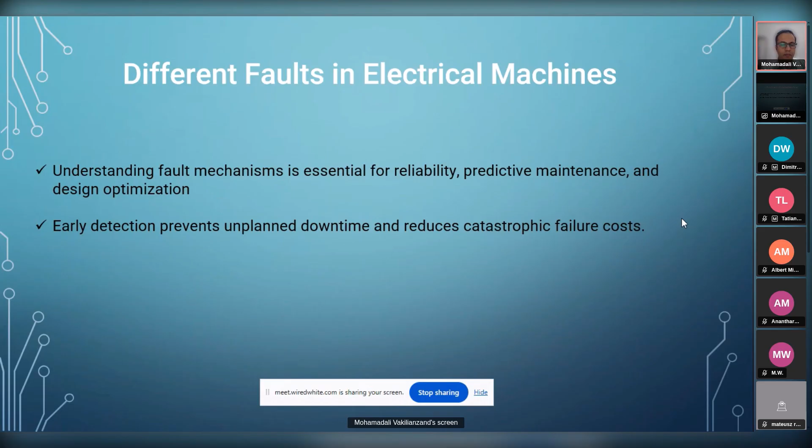Let's have a look at the classifications of different faults. Most of them overlap with each other, but in these categories we can see the electrical faults inside the stator or rotor winding, and we have supply faults like voltage source faults or inverter faults.

We have magnetic faults. Eccentricity and demagnetization are completely magnetic faults, but eccentricity has overlap between magnetic and mechanical faults. In this webinar's live demo, we will focus on the eccentricity fault: how to model it, what this fault is, and what the results of this fault are in motor operation.

We have thermal faults like overheating and insulation degradation, and mechanical faults like bearings, shaft, and misalignments like eccentricity.

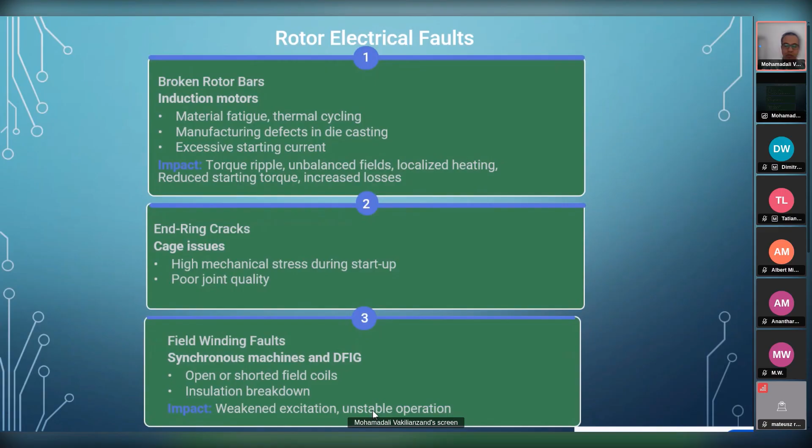About the broken bars and end ring cracks, we have almost the same effects. We will have more torque ripple, unbalanced field, localized heating on the crack or disconnected part, and the starting torque will decrease while the torque ripple increases. And we have more losses inside the machine.

But the reasons for these faults sometimes have different causes. For example, in the rotor bars we may have fatigue from heating up and cooling down - thermal cycling - that causes a broken bar. We may have manufacturing defects in die casting: if we have very small slots inside the rotor, the possibility of the aluminum inside the bars not connecting properly is high. And when we have line start induction motors, high starting torque or high starting current will both cause shock inside the bars and make them broken.

About the end rings, because usually in motors we have copper instead of aluminum, we have to connect the rotor bars together and weld them, and this may cause problems in the joint quality. We also have stress and fatigue affecting the end ring.

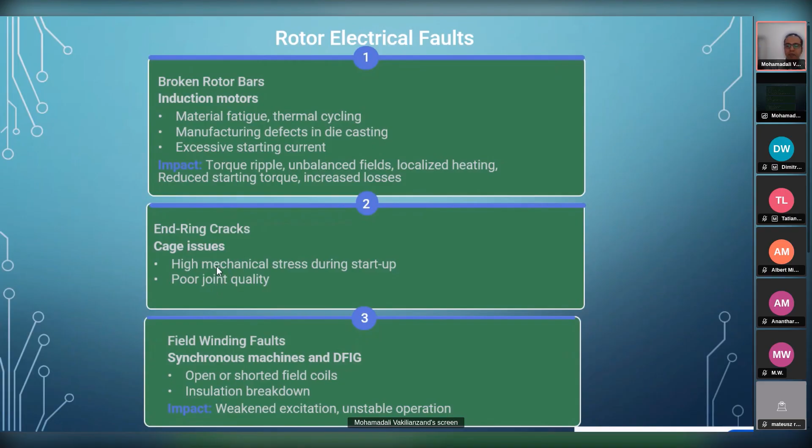About permanent magnet demagnetization - that is a very common fault inside motors with permanent magnets like BLDC or PMSMs. It means we have partial or complete loss of magnetic remanence, the strength of the magnet inside the motor.

Some causes we can count: high operating temperature near the Curie point, or even when temperature is high but still below the Curie point, the demagnetization curve will be lower, and with a lower negative magnetic field, the magnet can be demagnetized completely. We have a high temperature problem here.

If we have high temperature, the risk of demagnetization will be higher, along with excessive armature reaction in fault or overload conditions. When we have negative flux density in comparison with the magnet's flux density, we have the risk of demagnetization. And of course, mechanical shock and impact will damage the magnets too.

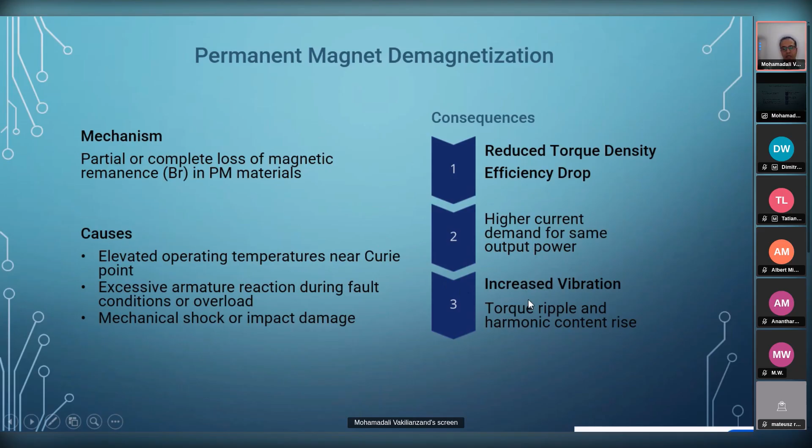It will reduce the torque density, it will reduce the efficiency, we will have higher current for creating the same torque, and we will have higher torque ripple and vibration inside the motor.

The fault we will talk more about in this webinar is eccentricity. Eccentricity means unequal air gap between the stator and rotor. With this definition, we have different eccentricity types: static, dynamic, and mixed eccentricity.

Static eccentricity happens when the rotor center and the stator center are both fixed, but they are not aligned, not at the same point. We have a smaller air gap in some part and a bigger air gap in other part, but everything is fixed. The air gap is fixed in this position.

We have dynamic eccentricity when the rotor center rotates around the stator center. In this way, the air gap is not uniform, and the smallest part and biggest part will change in each cycle. And of course, we have mixed eccentricity, which is the combination of both of these faults.

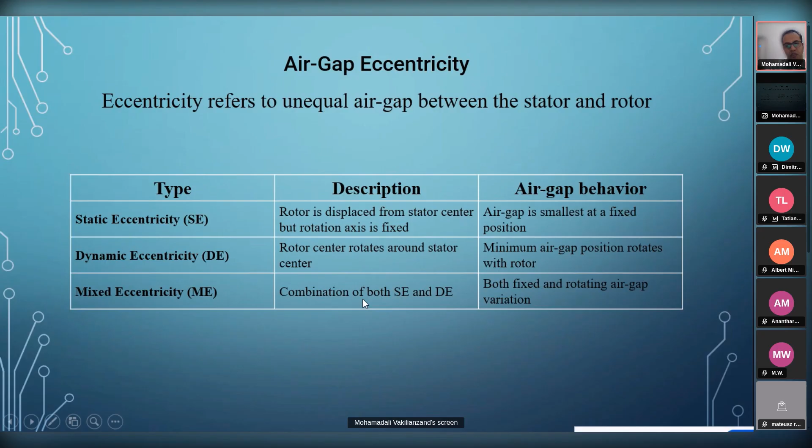To have a better view, I created an exaggerated video about each of these eccentricities. As you can see, in static eccentricity, the rotor center is fixed, the stator center is fixed. They are not coincide, they are not at the same point.

In dynamic eccentricity, the rotor center will rotate, and in this way we have a non-uniform air gap that changes at all time steps. With mixed eccentricity, both of these faults exist together.

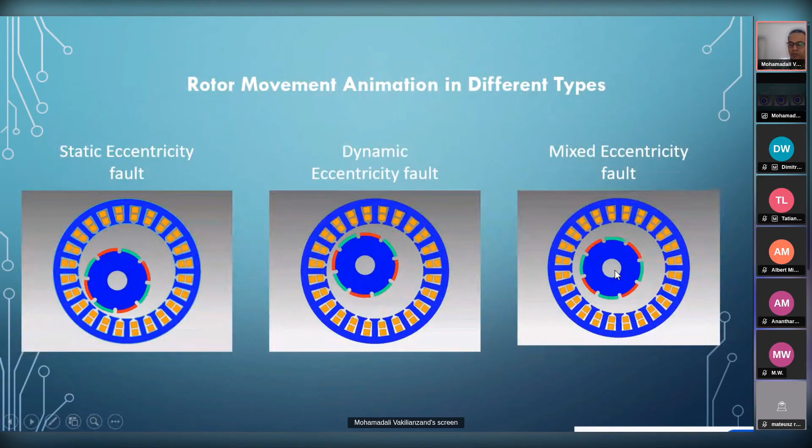To review some causes of these faults, I gathered some of them, but you will see the recorded video of this. You will have access to the recorded video and this PowerPoint if you fill the chat box and the poll that my colleague shared. The cause of static eccentricity usually refers to manufacturing tolerances and bearing misalignment.

Usually static eccentricity happens during the manufacturing process and it will be fixed. Stator core deformation will cause static eccentricity too, or rotor positioning during assembly. And sometimes we have faults in the frame, and the frame is distorted.

Dynamic eccentricity usually happens at the operation point, due to bearing wear or looseness, rotor shaft bending or deformation. It can be due to magnetic forces or thermal problems.

Unbalanced rotor happens when we have uneven mass distribution on the rotor, and thermal expansion occurs if we fix both sides of the bearing and have a hot shaft; the thermal expansion will cause some deformation in the shaft.

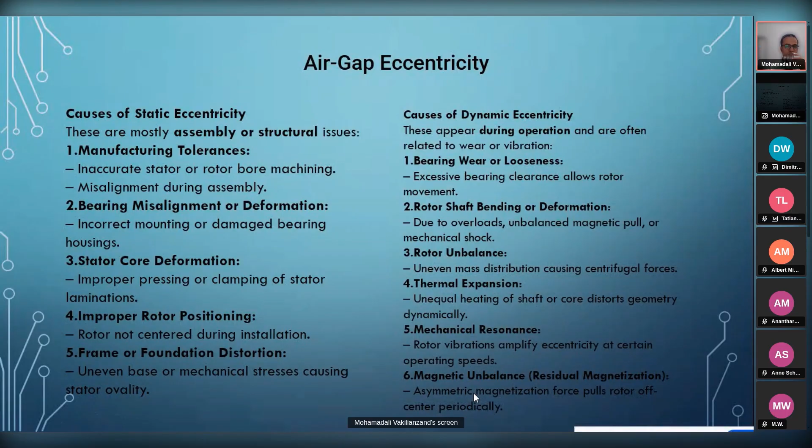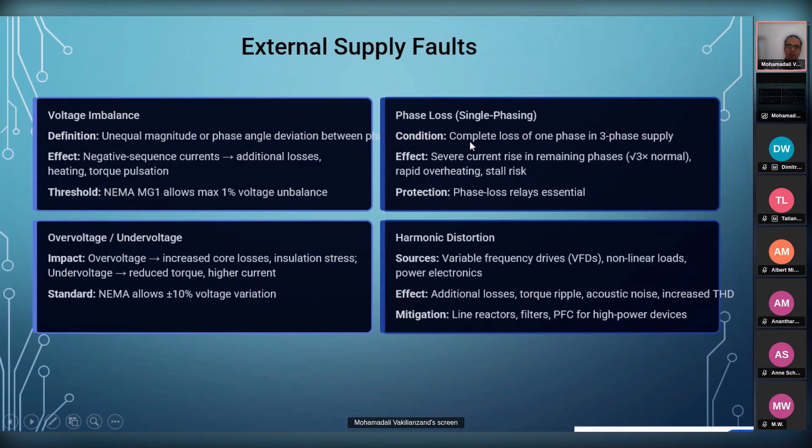Now we will go to have a live demo in the software to model the eccentricity fault. After that, if you have any questions, you can write them during the webinar, or afterward inside the chat box, and I will be glad to answer them all.

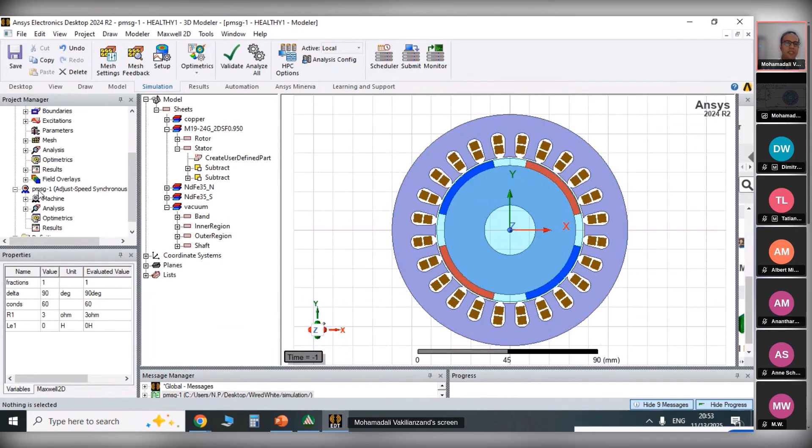For simulating the project with static and dynamic eccentricity, I choose a surface-mounted permanent magnet synchronous machine, a surface-mounted PMSM. You can draw the whole geometry by yourself manually, or you can use RMxprt models, the predefined parametric simulation, a template-based model of the motor.

Just remember, to model the eccentricity, you need to have the whole complete model of the motor. Because if you use symmetrical or periodic boundaries, it will model the eccentricity or any other faults like demagnetization, coils, and other faults uniformly and periodic on different segments too. So you will not see any effect, or you will extract wrong results. So to model any faults, try to have the complete model of the geometry.

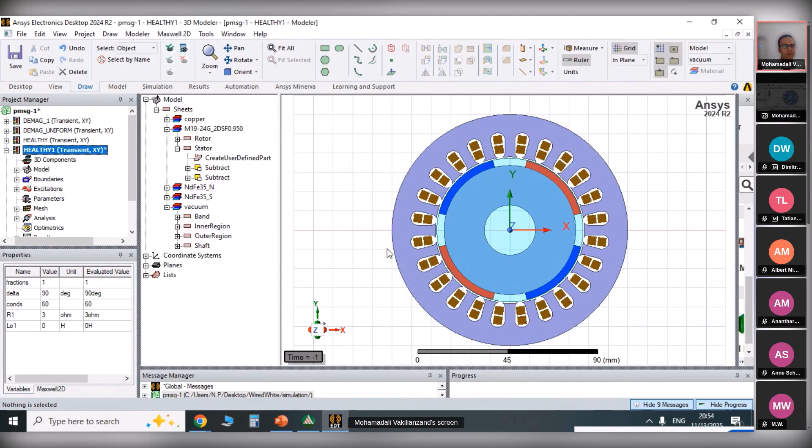I created this model with RMxprt. It's one of the default examples of RMxprt. But to have a better view and easier simulation, I made the air gap a little bigger. Now we have 1 millimeter air gap between the rotor and the stator.

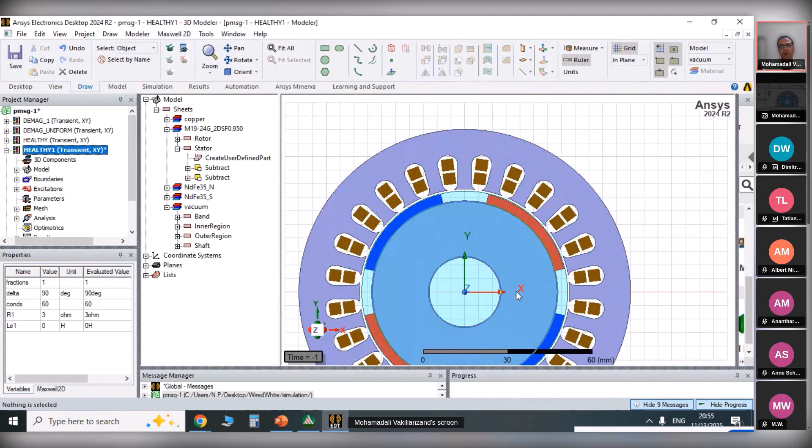Now let's start. This is the healthy machine. Everything is at the center. The rotor is at the center of the stator, and the center of rotation coincides with the stator. This is the healthy machine, and for getting the results, first model the healthy machine and extract all the results. We will see differences in the torque, in the back EMF, and in the current harmonics.

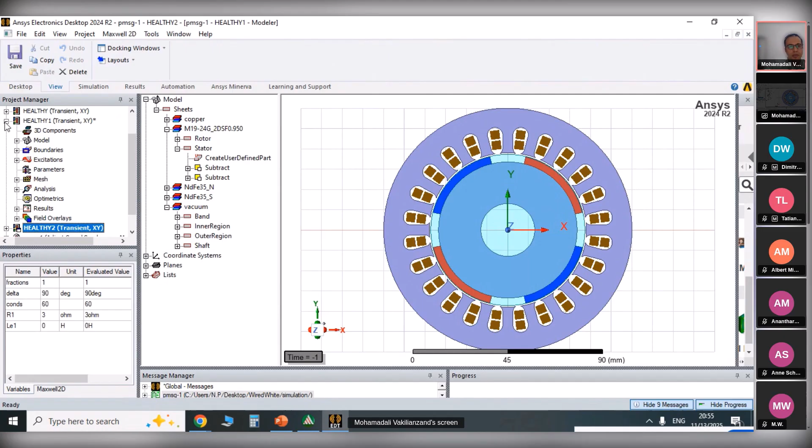I model this simulation as a healthy one. I will make a copy to be able to model a static eccentricity. Just copy the healthy machine to have exactly the same geometry and setting to be able to compare the results. I create another model and rename it as static eccentricity.

We talked about static eccentricity. It will change the center of rotation in comparison with the center of the stator. So now how can we model that problem?

Remember, when we assign a band for the rotation, of course we don't have enough time to review the modeling of the machines step by step from the beginning. But if you create your model from RMxprt, it will assign most of the parameters automatically.

When we have a band of rotation and we assign it, we choose the moving vector around the global Z. We can define different coordinate systems, but for easier simulation, I choose this way. Don't change the rotor center. Always the rotor will rotate around the center of the global coordinate system, around the Z axis.

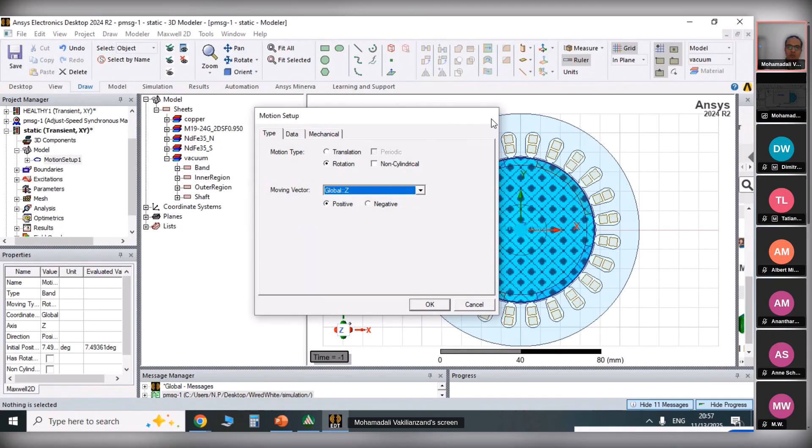So we don't change the rotor setting. Instead, we have to select all the other parts than the rotor, like all the coppers and the stator, and remember not to forget about the outer region or any other parts that are related to the stator. Because if you move some of the parts and not the others, we will have contacts and overlaps, and you will have errors.

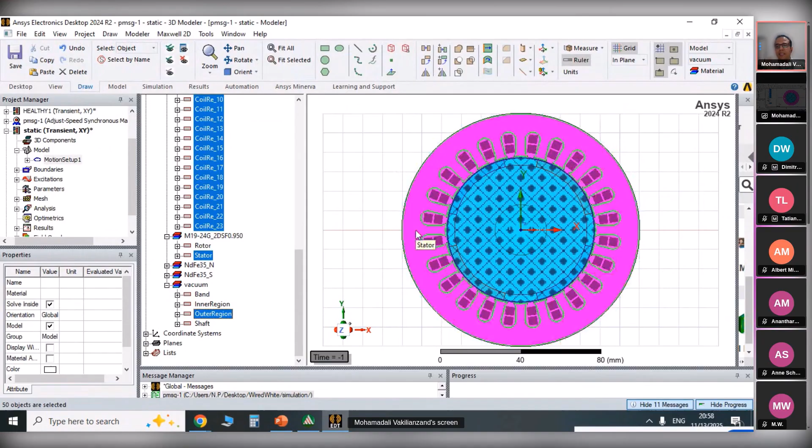So the center of rotation of the rotor is the global center. I want to change the center of the stator instead. It doesn't matter if we change the rotor or the stator. For a static eccentricity, the easiest way is to select all the parameters of the stator and move them.

For example, we have 1 millimeter air gap. I want to model 30% eccentricity, so I will shift the whole geometry from 0, 0, 0 to 0.3 millimeter in the X direction. You can choose any other vector to model the eccentricity, but it doesn't actually matter because the motor is rotating and the results will be the same.

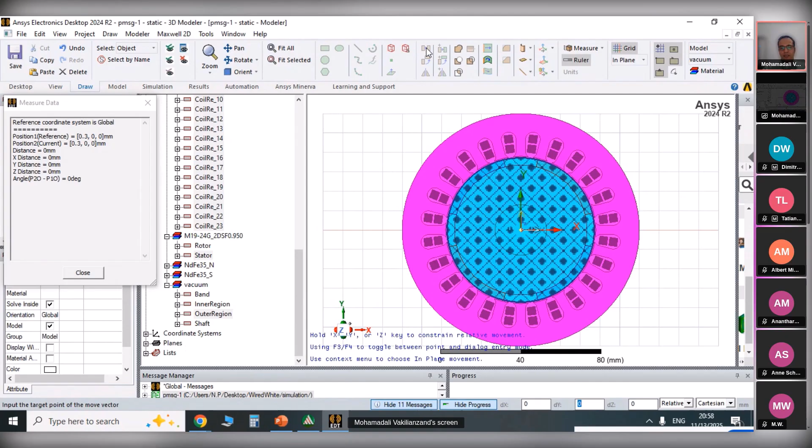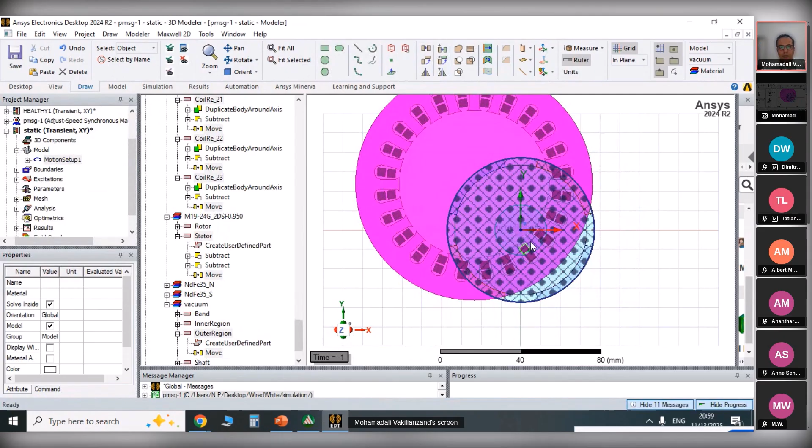I made a mistake here. I have to retype the 0, 0 and enter. I think I again made big values. If you want to type exact values, use the keyboard to change the numbers. I used the mouse button and it made a problem here.

I have to do it again, select all the values, move it from 0, 0, 0 to 0.3 millimeter. It's a very small change, but that's the way it happens in real life too.

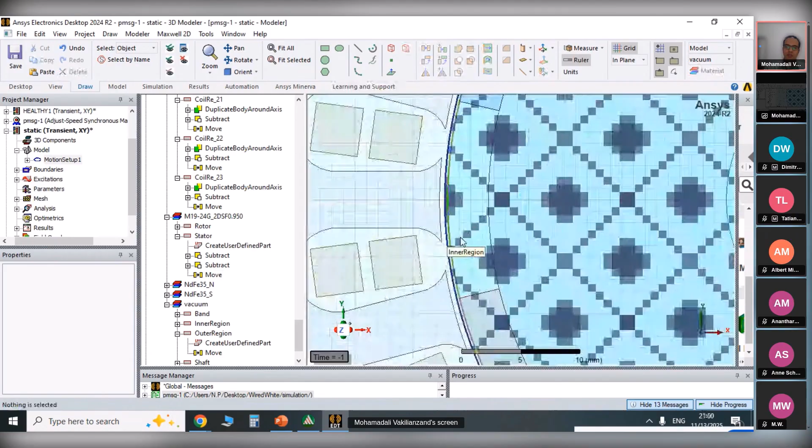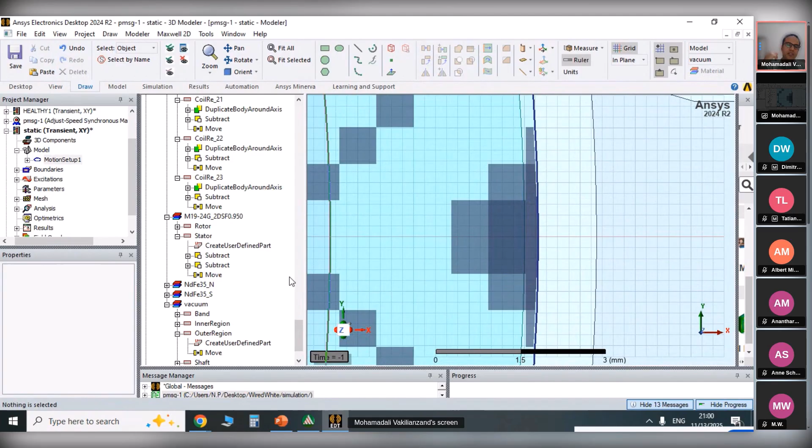Before moving on to the dynamic eccentricity, I want to let you know a trick to create a parametric simulation. Actually, ANSYS Maxwell will not let you use a parameter in the moving part. When you are moving objects, you cannot put a parameter inside the values of movement.

But after you moved everything, you can right click on the name of the simulation, go to design properties. When we add the parameters, add a parameter like static ECC, a static eccentricity.

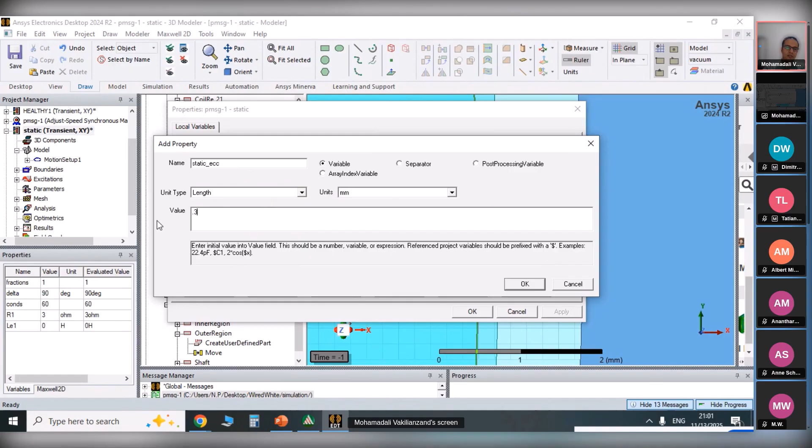Choose the value as length in millimeters, and make the initial value 0.3 millimeter as I designed. Now you have a parameter named static eccentricity.

You cannot move everything when you're clicking on the move object, but in the design tree you will see all the parts that are moved. You can select all the movements one by one, holding the control button. After you selected all of them, come here in the properties and you will see all of them moved by 0.3 millimeter.

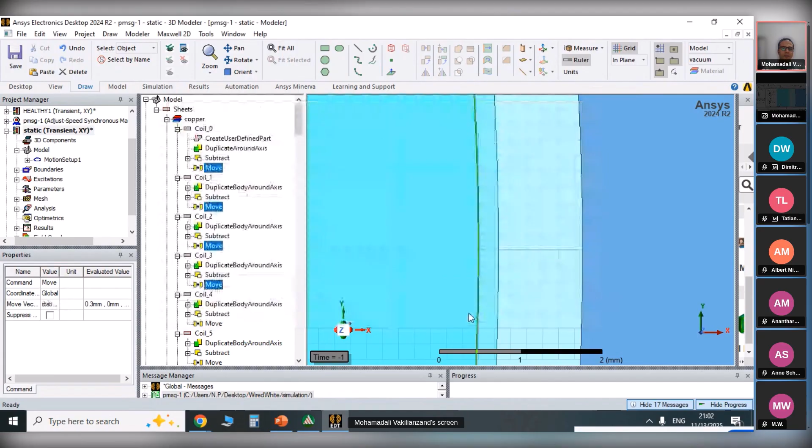Instead, you can write your own parameters that you created. This way I don't want to spend time selecting all of them. I selected some of them, but I want to show you the effect. If I select some of the coils, and let's do the same for the stator core too, the static eccentricity.

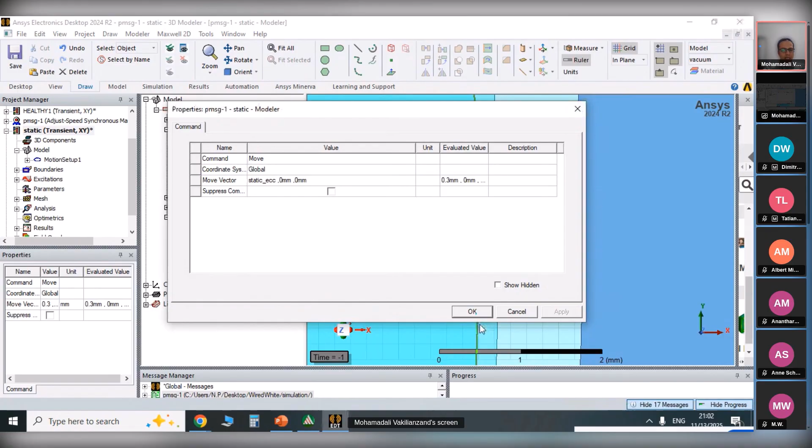Click on apply. This way, without doing the same process again from the beginning, you can simulate different scenarios with different eccentricity sizes.

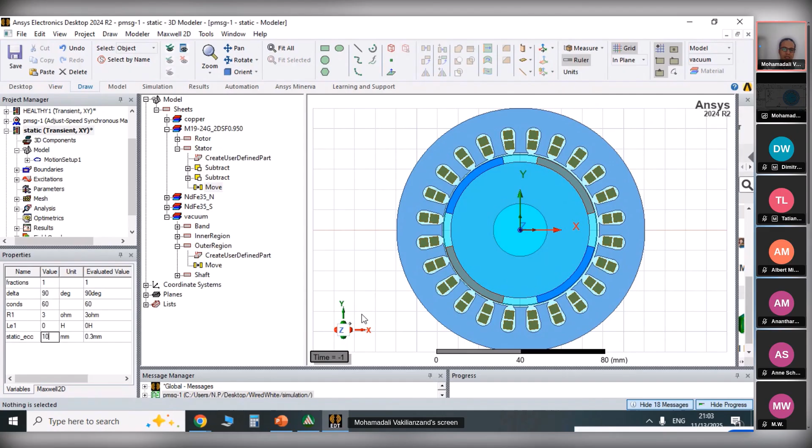Now I have a parameter here that I can make exaggerated geometry, for example 10 millimeters. Of course we will have intersection, but when you change this parameter, it will automatically change the geometry, so you don't need to do it again manually.

I will show you another solved simulation about the static and dynamic eccentricity that shows this parametric simulation for different scenarios for different percentages of the fault.

Okay, we talked about the static one. Let's have a look at dynamic eccentricity. For modeling the dynamic eccentricity, let's make the static one 0 to not have any intersection or confliction.

In the dynamic fault, we have to move the rotor center inside the band. It's a very important point in the simulation of ANSYS Maxwell. It doesn't matter what shape is inside the band, it will rotate the whole geometry around the center of the band.

So if you move one magnet or all the magnets and rotor in the same direction, it will rotate all of them together inside the band. And the band should be at the center in the Z direction.

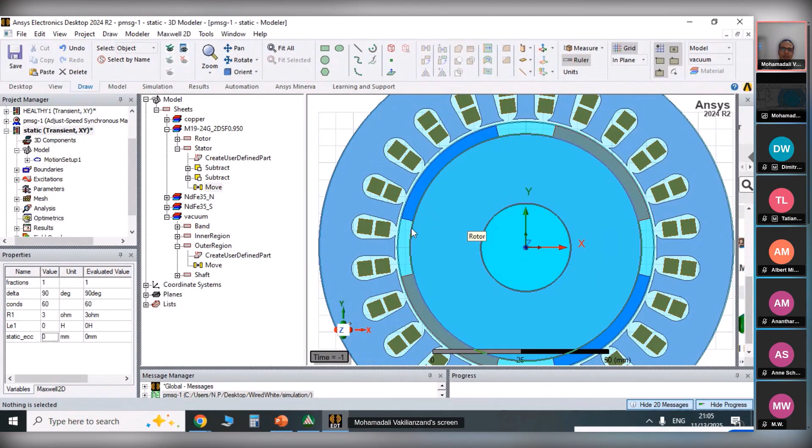You don't need to change the band, but you have to change anything inside the band as a rotor. Another point very helpful in your simulation, especially when you want to model mixed eccentricity, is that when you create a static one and dynamic one together, you may have some intersection.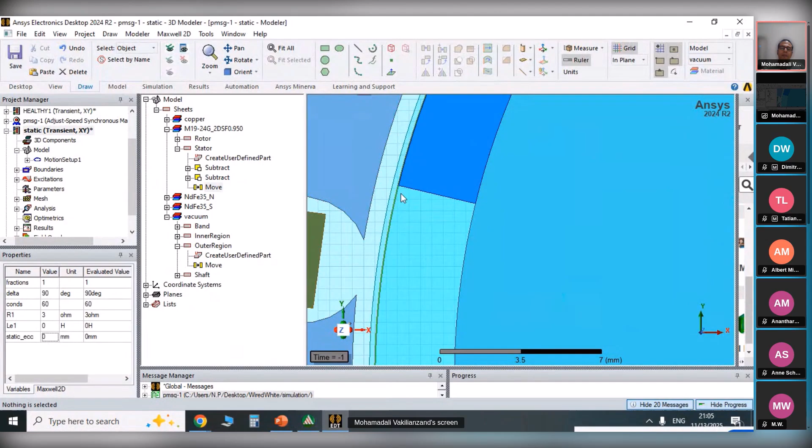Manage the band size: for example, if you want to model a static eccentricity and move the whole stator, make the band closer to the rotor. When you want to model dynamic eccentricity, make the band bigger to be closer to the stator. This way you can have better free space to move the rotor parts.

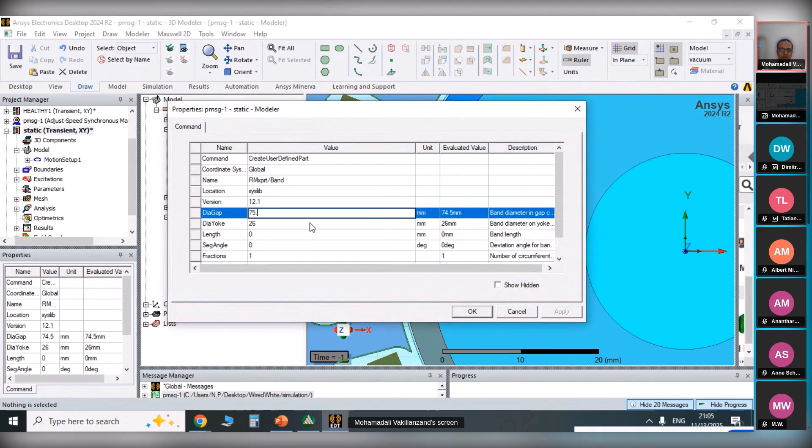Now I will go to the design tree and increase the diameter of the gap, for example to 75.5. Let's see if it's working or not. Yes, you can see the band is bigger now and it is closer to the stator teeth.

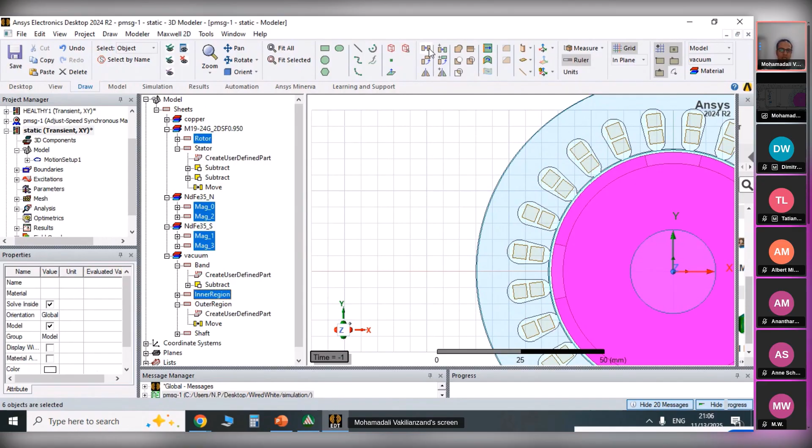This way I have to select all the rotor parts like rotor steel, all the magnets, and again don't forget the vacuum part. We have an inner region inside the rotor that should be moved.

Again, you have to click on move, select a center for movement as 0, 0, 0, and move the bodies to, for example, 70% of the air gap. Let's see if we have any intersection or not.

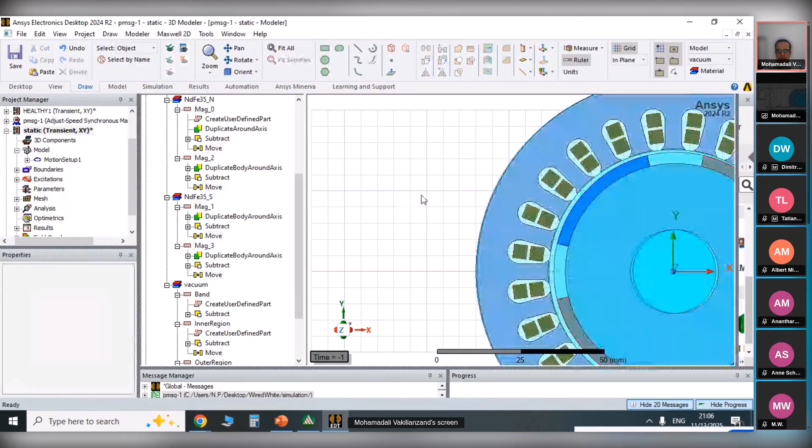This way we will have asymmetric air gap and we didn't move the shaft. Don't forget to move everything inside the geometry, inside the band.

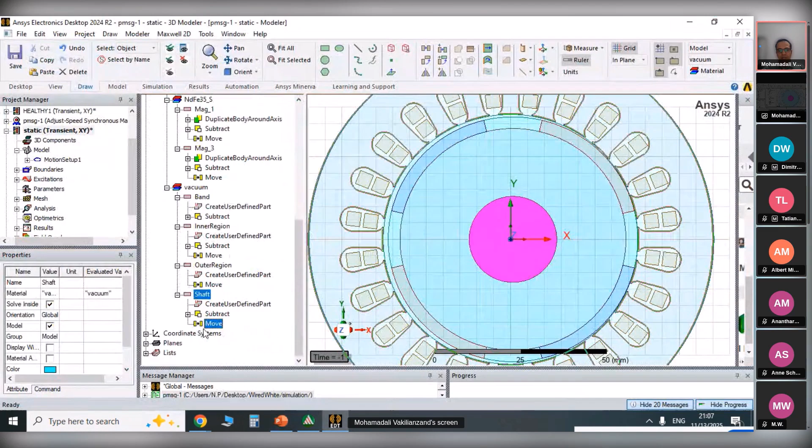You can use the parametric simulation here too when you created the movement. After the movement, select all the move operations and change them to the name of a parameter.

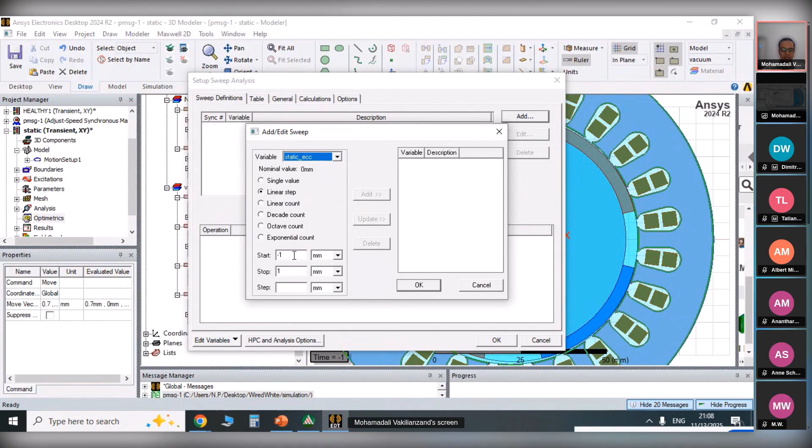Now in the optimetrics, you can add a parametric simulation and sweep the static or dynamic eccentricity. Just pay attention not to have any intersection between the parts. You have to use the limits of your design.

This is how we manually model the eccentricity, static and dynamic, and mixed eccentricity is a combination of them.

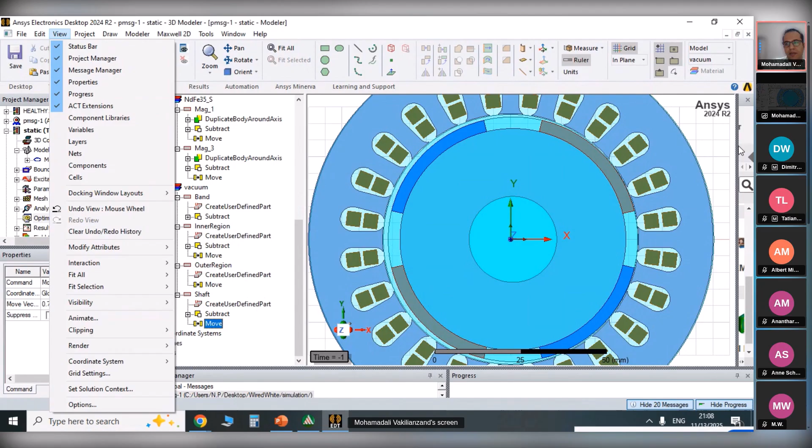In the newer version of ANSYS Maxwell, if you go to the ACT extension, you will see a wizard that you can use for modeling the eccentricity. If you open the wizard, you will see Maxwell eccentricity, and you can click on this wizard.

It will help you model this fault, but it will work perfectly only when you created the model from the RMxprt. If you changed any part, for example changed the shape of the magnet or deleted and redrew the magnet yourself, sometimes it will cause problems. It will move all the magnets except the one you drew, or except the parts you added to the simulation.

Sometimes it has errors, but the workflow is the same, it will do exactly as we discussed. For rotational part eccentricity or rotational axis eccentricity, one option lets you choose the rotational center, and another lets you change the misalignment between the centers of the rotor and stator.

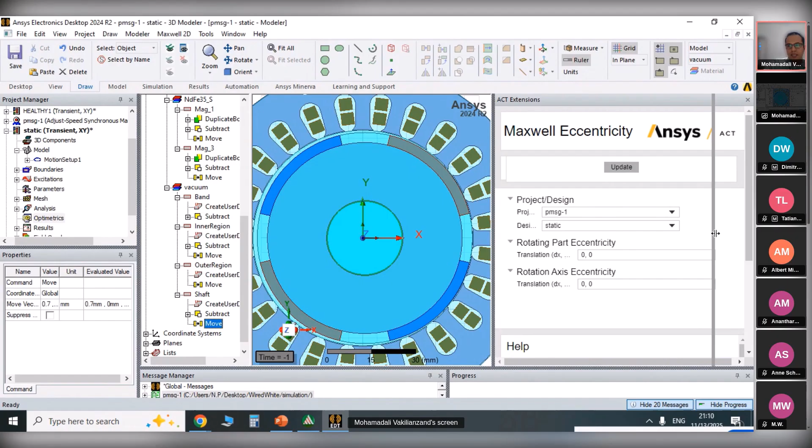This is how we can use the eccentricity wizard inside Maxwell, but I still suggest you do it manually to have full control over the simulation you are creating.

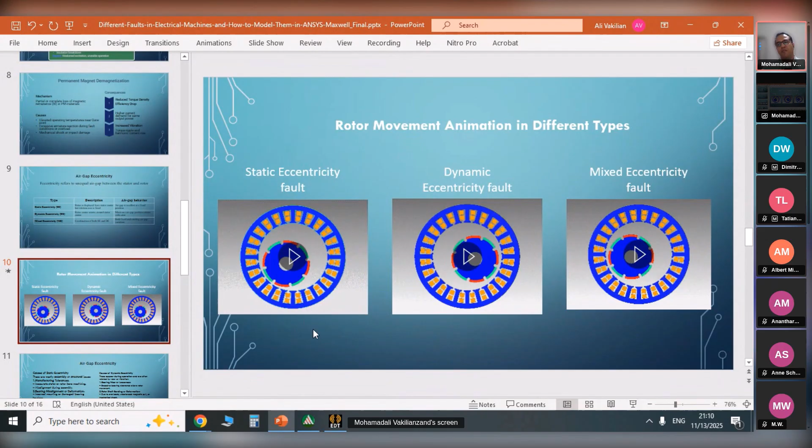Another point: we discussed 2D simulation and one type of eccentricity, but there's another type too, where the rotor center at the bottom of the stator changes compared to the top of the stator. For this modeling, you need a 3D model or some estimation, since you cannot model that inside a 2D simulation. And 3D simulation will need a lot of time and resources to analyze.

Modeling all the faults, you need a complete model for the simulation, but modeling these faults on different machines will create different results. For example, if you have this 4-pole magnet with a demagnetization fault, one of the magnets may be weaker or stronger than the others.

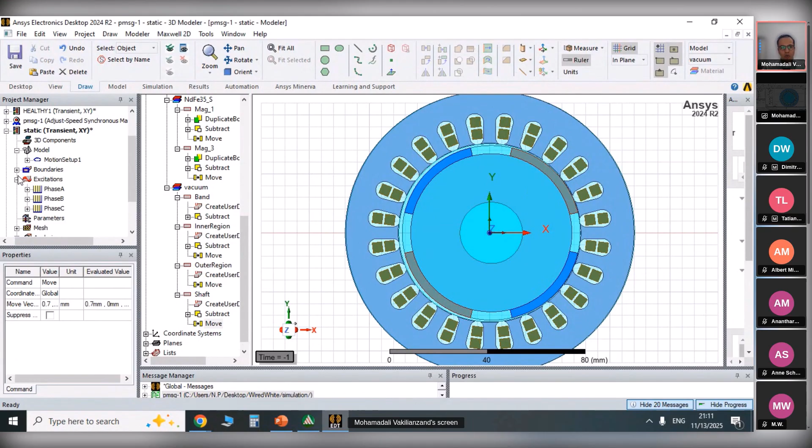When we have 4 poles with this stator winding, and a rotational rotor that has a fault like eccentricity or demagnetization, sometimes one coil will compensate for another coil's problem, so you will not see the result exactly. That's why you have to create plots of torque, back EMF, and flux density to find the problem inside the results.

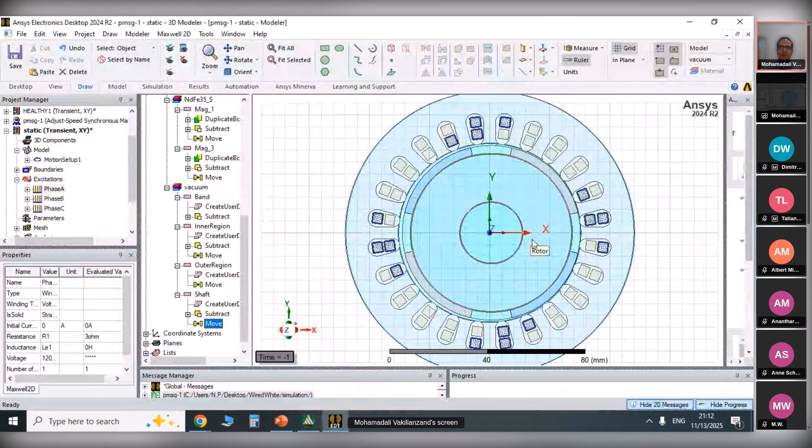For showing the result of a fault, I have a pre-solved simulation file. I chose an induction motor, a squirrel cage induction motor, for this example, because motors like PMSM have intrinsic torque ripple, so finding the additional torque ripple when there's a fault is harder than with an induction motor. Applying the fault is easier for this example because we have a lower number of elements, so I use this simpler model, but I applied both faults on this motor before and analyzed the simulation to get results to discuss.

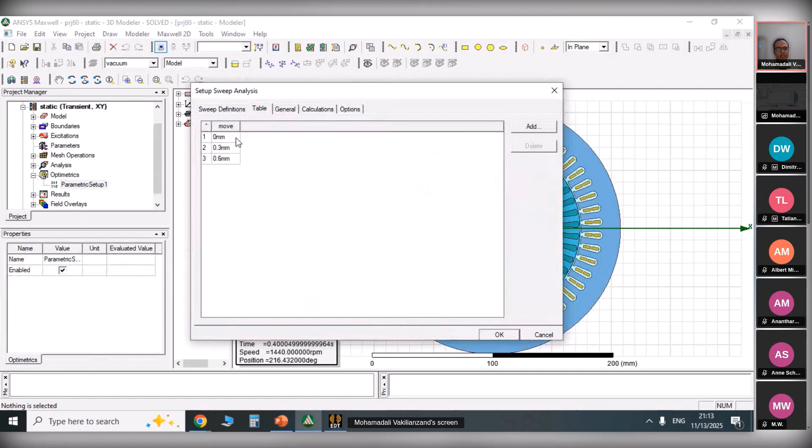Now, first let's look at the static one. For static eccentricity, I modeled a move parameter to move the geometry, to move the stator and all the coils. I solved the parametric simulation in 3 different steps: 30% eccentricity and 60%. The same was done for dynamic eccentricity, with 2 different values, plus the healthy case.

If we use 0 movement, 0 displacement, it is the healthy machine. If we use the other values, we will have faults inside the motor. So let's check the results.

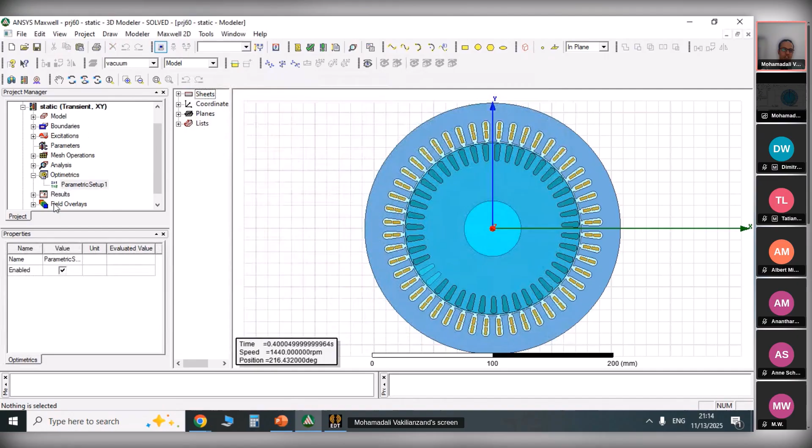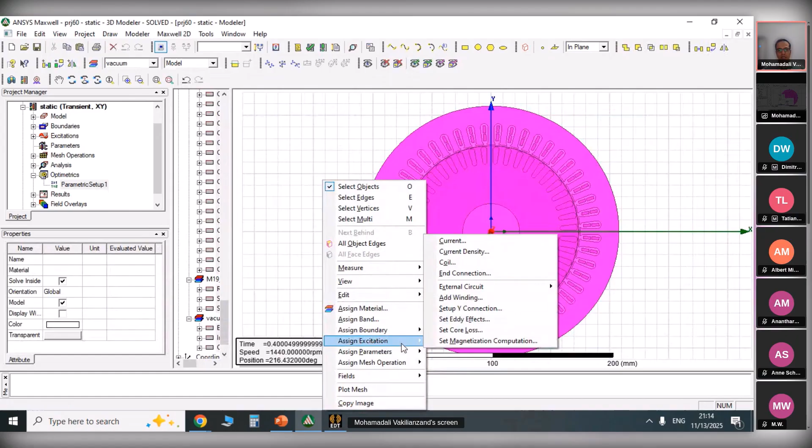We have 2 kinds of results we can use to find the eccentricity problem. First are the field reports, like plotting the magnetic flux density or flux lines to see if it is symmetrical or not. The best way is to use the magnetic flux density, magnitude of B, and click OK.

It will plot the flux distribution at the selected time step. You can use this plot to find the problem, or you can draw some lines inside the air gap. But remember, if you want to use these plots, you have to enable save field inside the analysis setup, and be sure you selected enough points for saving field.

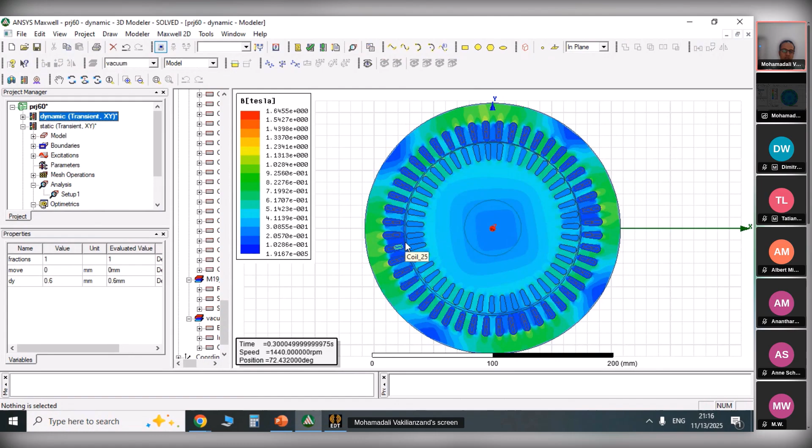We can plot different parameters in the field, like the loss distribution, field intensity, current density, and other stuff. It depends on your simulation. For example, in this induction motor, we can plot the current density inside the rotor bars to see if the eccentricity changed the distribution of the current or not. You can plot all of them together in the results.

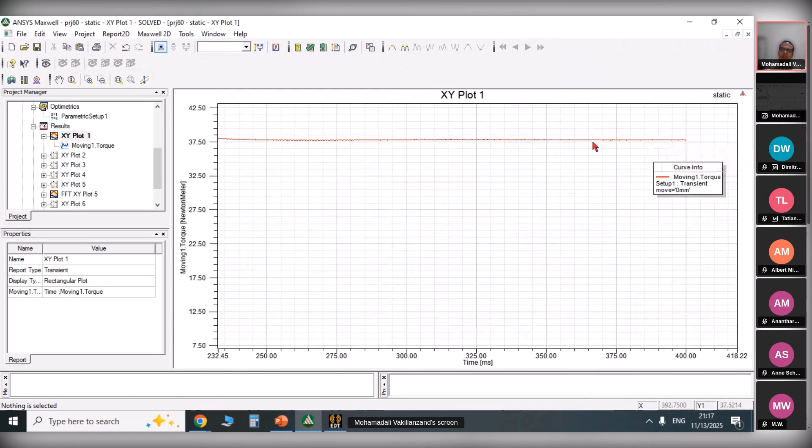Let's have a look to use our time more efficiently, and look at the other results too. First, let's plot the torque of this motor when we don't have any problem. You can see I choose this induction motor because it has a very smooth torque when it reaches steady state. But to plot the other values of the fault, I have to come here to the plot properties, go to the family, and change and choose other values of the misalignment too.

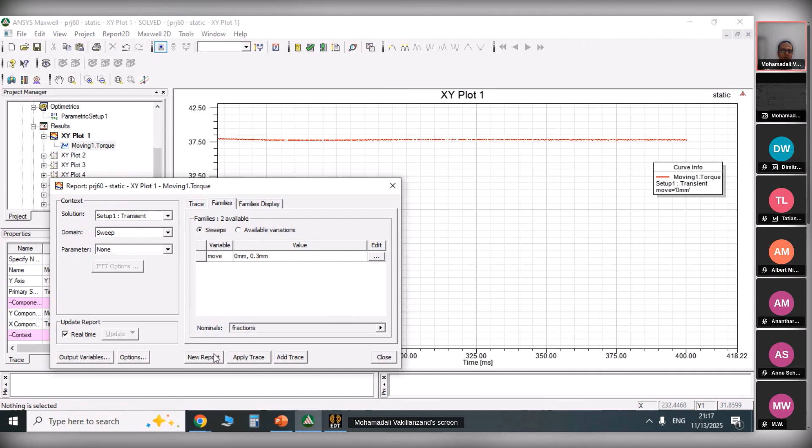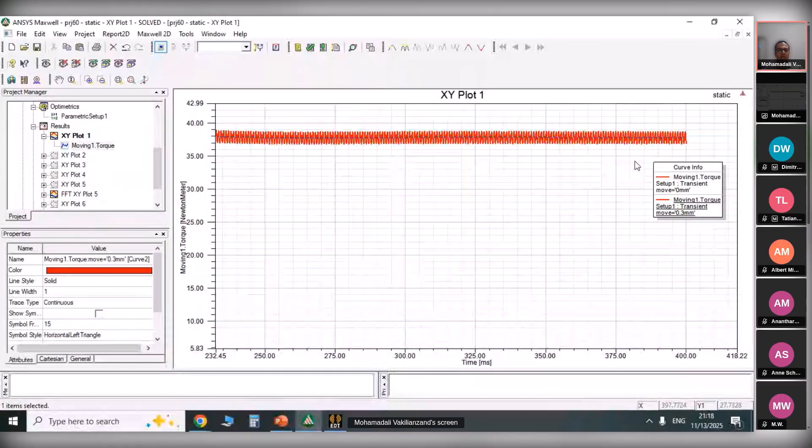Now I want to plot 0% eccentricity and 30%. If I apply the diagram, you will see both diagrams, one without any torque ripple and one with higher torque ripple. If I zoom in, you will see the torque ripple has its own frequency too, and this frequency is one of the main points that we can diagnose the problem.

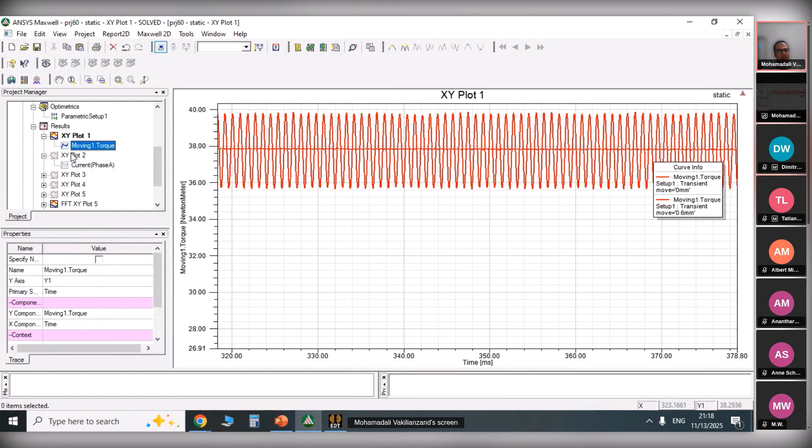Let's have a look at the other fault, 60% fault too. In this fault, you can see the torque ripple is much higher. The average torque does not change at all, but the torque ripple increased a lot. This will happen in the other parameters like current too.

Let's just plot the phase A with different eccentricity levels, phase A with all values of the fault. One of them, the first, current without the fault, is purely sinusoidal. But when we have eccentricity, you can see different harmonics will be added to the simulation.

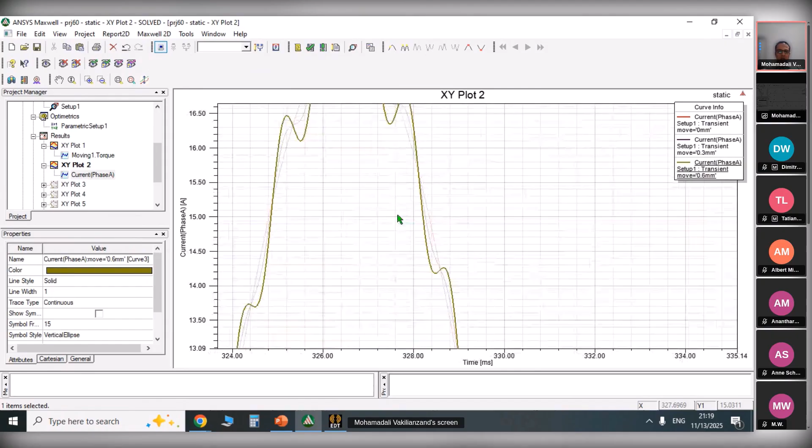An important point is to create FFT, Fourier transformation, from this current to be able to diagnose the fault. That's the way that we use for diagnosis in real industries too. They measure the current, extract the harmonics, and understand there is some fault. And related to the frequency of those harmonics, they can even estimate the severity or type of that fault.

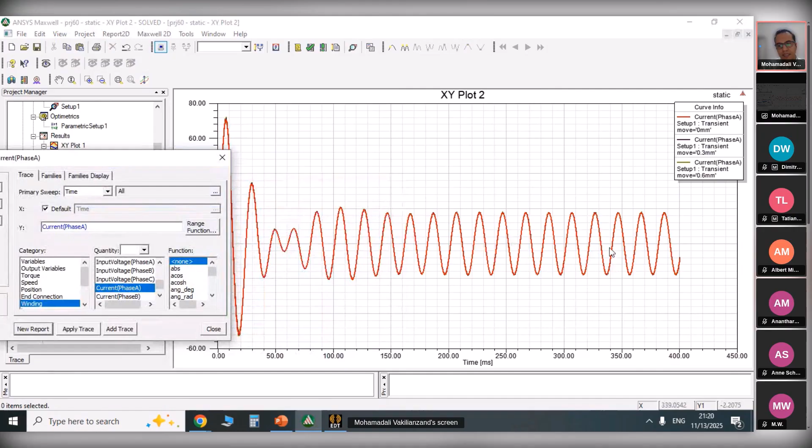For creating FFT, I want to mention this point too. You need to plot the diagram after the steady state, don't plot the initial and transient part. So I will choose, for example, to plot the diagram between 300 millisecond and 400 millisecond. I will add the new plot. When you have the plot on the steady state, try to choose a full cycle. Now we have complete 5 cycles.

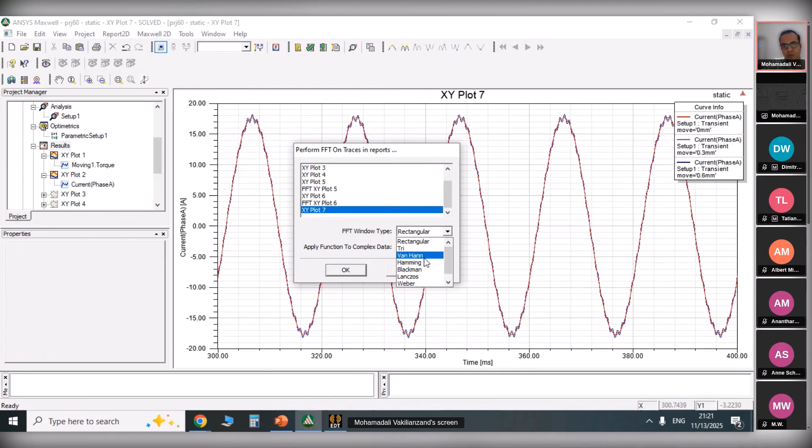You have to right-click on the results and choose the Perform FFT report. Choose the last plot that you created and do the rectangular FFT on, for example, the magnitude of this. You will see the motor with healthy condition does not have any harmonics related to its main frequency, and it only has the 50 Hertz harmonic of the current. But the other motors, especially when you have more severe fault, will have harmonics related to the main frequency.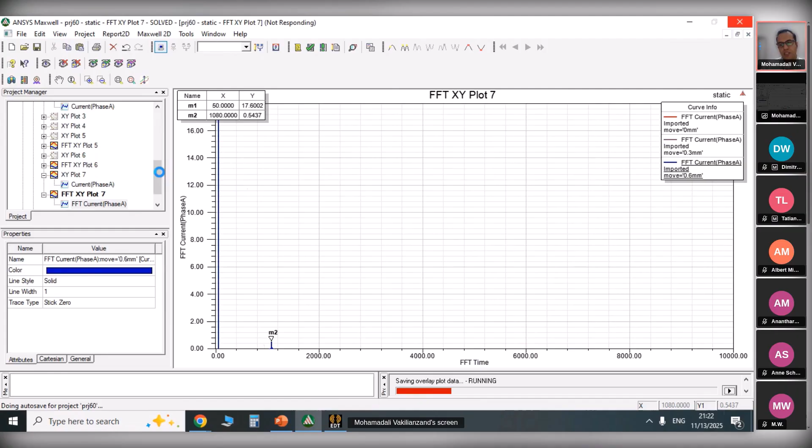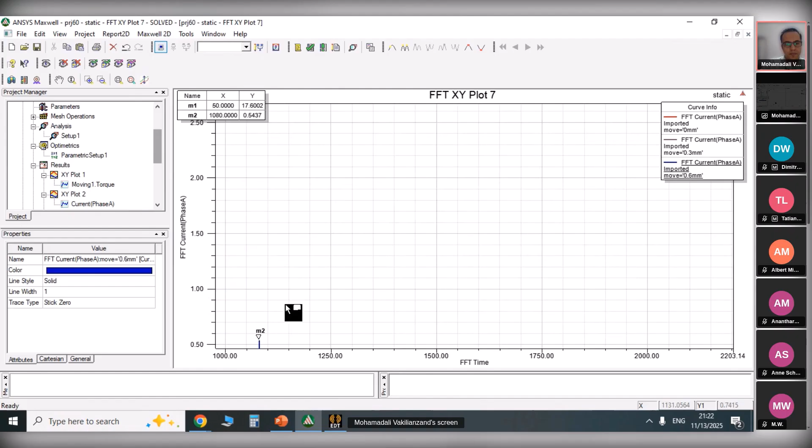We will have a look at the results of dynamic eccentricity too, and we can start the question and answer session. I created a plot, it will take a little time, but if I zoom in the diagram, you will see these subharmonics are important too. You have to measure them and analyze them to be able to find the severity and type of the fault.

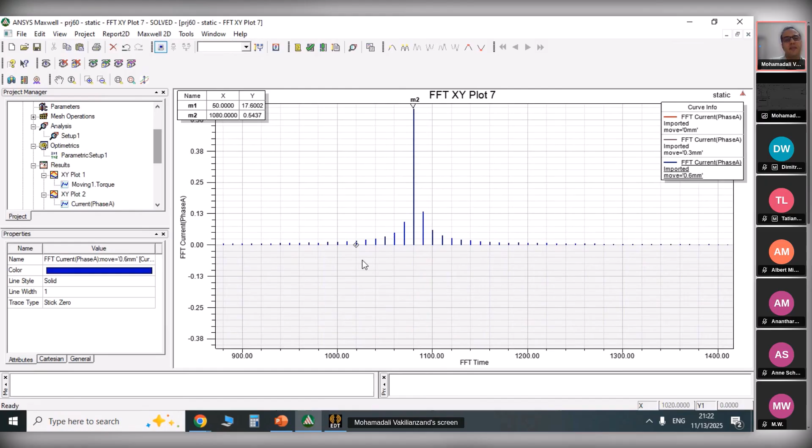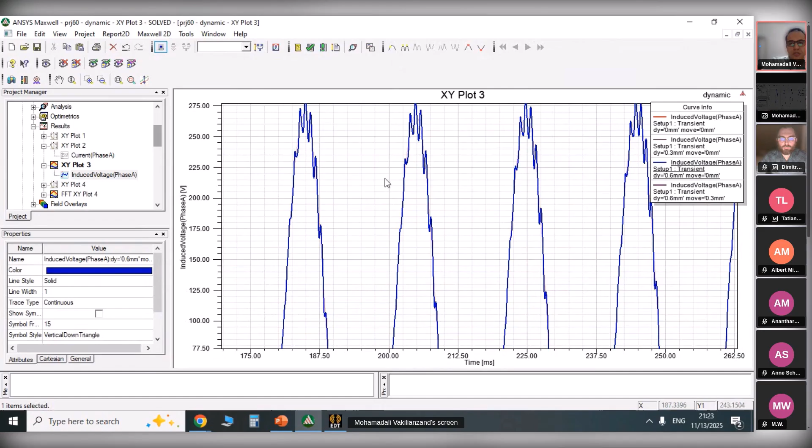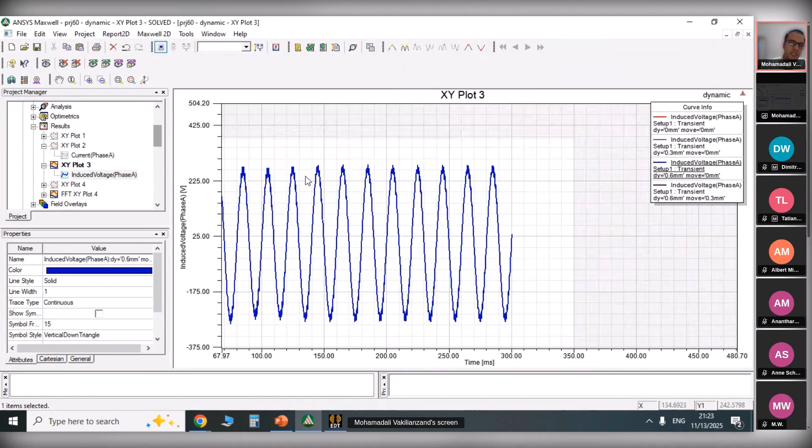In the dynamic eccentricity, we created FFT on the current. We learned how to do that, and we have the same problem in the induced voltage too. When you have a healthy machine, the induced voltage will be a pure sinusoidal waveform, and as you have the fault, mixed eccentricity, or dynamic one, you will have some additional harmonics to the waveform. You can do the same FFT procedure and workflow to find the frequency of these harmonics too.

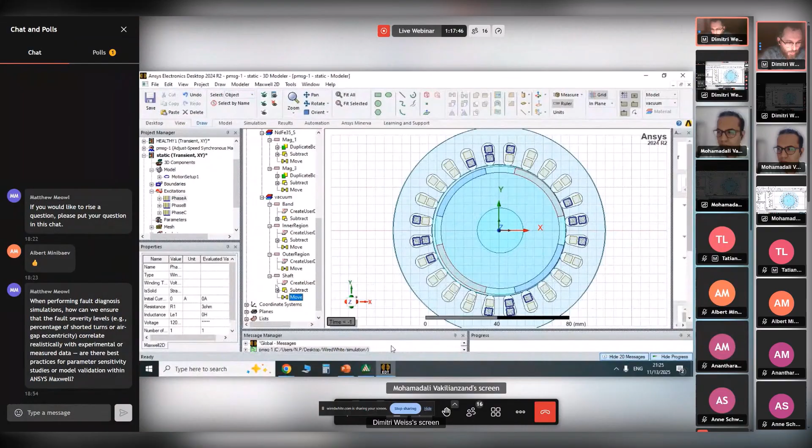It's regarding the validation of the simulation results, the modeling results, and the experimental measurements. Basically the question is about fault severity levels, meaning percentage of short-circuited windings or air gap eccentricity that correlates to a real, realistic scenario that can later be related to experimental or measurement results.

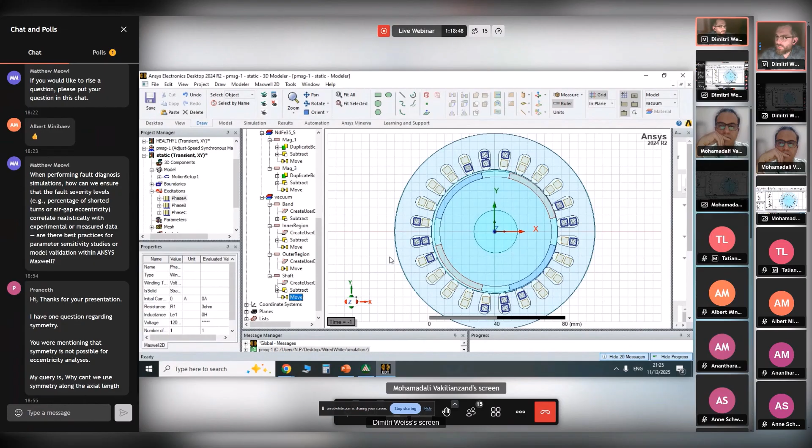What are the best practices for parameterizing this sensitivity study using ANSYS Maxwell in order to validate the modeling and simulation results on the test bench or from the field, from the real world? So how much eccentricity would be realistic? Is it more like 30% or 60%? Or for short circuit, how many turns do you short circuit in one winding or one phase in order to simulate the real life scenario?

Yes, as I mentioned, in this case we talked about the eccentricity. Whatever is possible in real life, we can simulate it in finite element software like ANSYS Maxwell too. For example, we have 1 millimeter air gap. If we move the air gap 0.3 millimeter, that is 30% eccentricity.

What is realistic? All the values can be realistic. We can have a healthy machine without any deformation or shift, or we can have 99% or 100% eccentricity, and that's the time the rotor will touch the stator and the motor will burn out completely. So all the values are realistic, and that's why we modeled the fault with parameters to be able to model all of them.

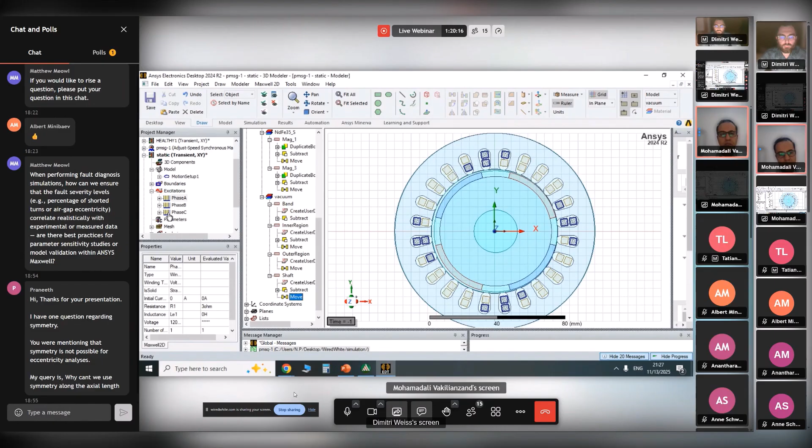How to experiment the results and compare them with experimental reports - many papers work on this part, many PhD theses worked on this part, and you will see different papers.

About the other parts that I talked about, because I'm sharing the screen, I didn't see that I am out of the meeting.

About the answer to how much eccentricity is realistic, it depends on the machine. It's possible to have zero eccentricity as a healthy machine and 100% air gap eccentricity - that's the time the rotor will touch the stator and the winding will burn out and disaster will happen. So all values between 0% and 100% are realistic, depending on the motor you are simulating.

And that's why we created parametric simulation, to have access to parametric sweep and changing the values. Many publications validate the results with real world machines. For example, they change the bearing sizes, change the bearing balls to have dynamic eccentricity, and they validated the simulation results.

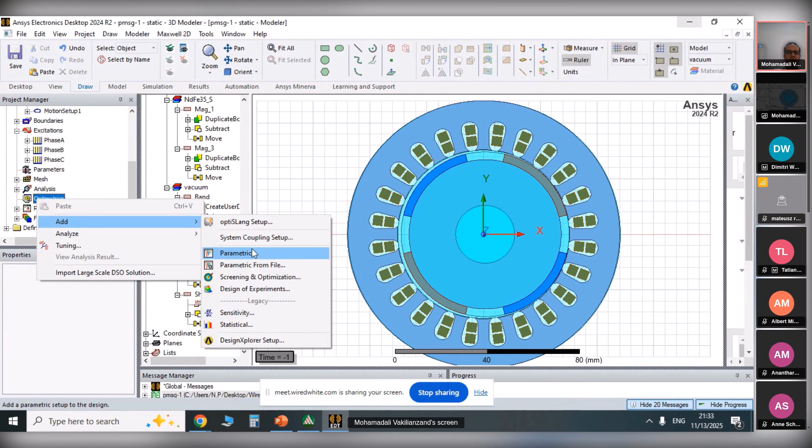So in my project, I always use parametric simulation near the specific point that I want to simulate. And you mentioned different types of faults like inter-turn short circuit. Just like the eccentricity fault, if we have 10 turns inside each coil and we short circuit, for example, 5 of them, we modeled 50% fault for that coil - or we can divide it by the total number of turns, and we get that percentage of the fault.

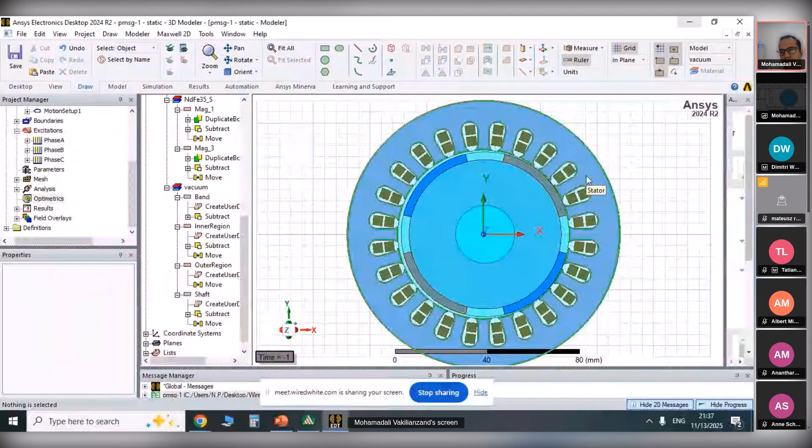Yes, it depends on the scenario you're modeling. For example, in this simulation I have 2 coils inside each winding. The simplest scenario is a short circuit between these 2 coils, where the whole coil, all 10 conductors, will be short circuited. You have to remove these 2 coils from, for example, phase A, and add them to another winding that is short circuited with a different resistance and without any excitation, because it is short circuited - we don't have voltage or current excitation. But this is the easiest scenario.

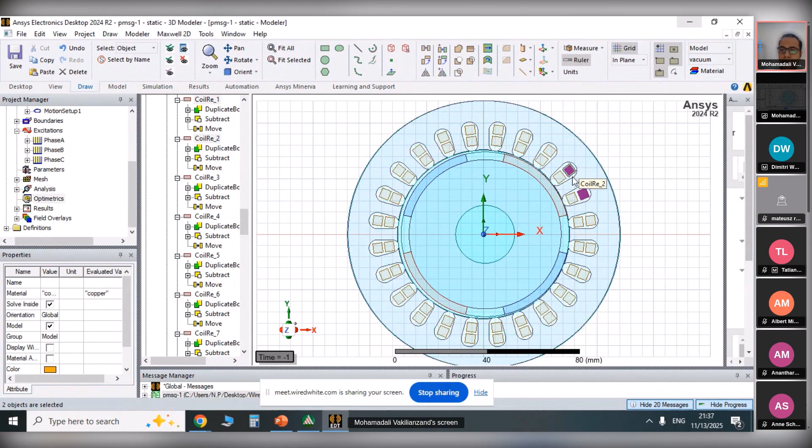If you want a percentage of this winding - for example it has 10 conductors in this coil, and you want to simulate 20%, just 2 conductors short circuited - in this scenario you have to split this coil. The rest of the coil remains in phase A, but this 20% will be short circuited, and you should assign different coils: an 8-turn coil and a 2-turn coil. These 2 turns will be connected to each other as a short circuit winding, and the rest will be connected to the phase they were originally connected to.

It depends on your scenario, and I mentioned in the short circuit or inter-turn short circuit videos in my course, I talked about it completely. You can have a view on the course content and get a better idea about the content and the videos.

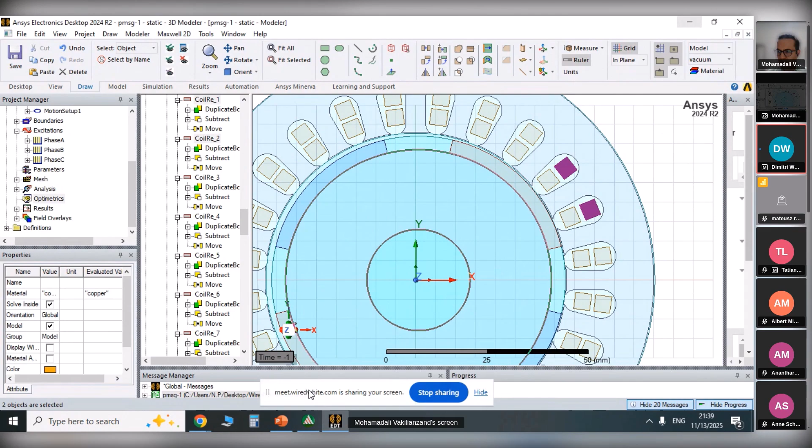All right, clear. Okay, makes sense. Thanks a lot, Ali. Anyone else would like to raise a question? Otherwise, I will wrap this up slowly and go to the presentation again.